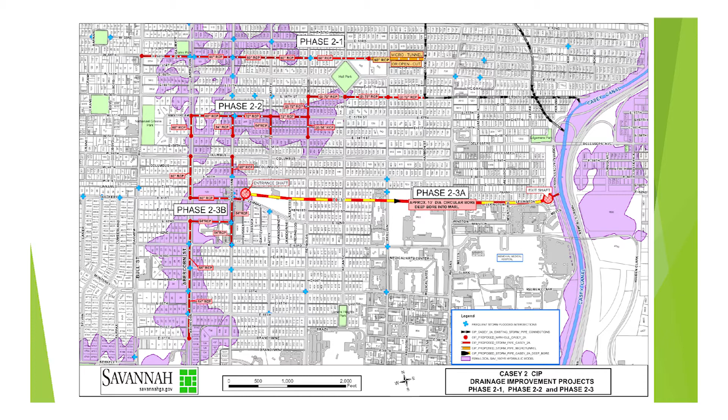And so again, this is not to get rid of any of the conversations for Casey. This is to really take advantage of technology and use it to benefit our citizens, specifically focused on drainage, which we all know is a challenge in a coastal city. And so just as I set the stage, I do want to ask Alderman Palumbo to come up and just kind of open it up and say a few words about this project. He has some knowledge of it. We have had a few conversations about how technology has improved and why it's important for us. Alderman Nick Palumbo.

Give it up for Heath Lloyd. Now I get to get up here and take all the credit and talk about all the great things that these guys are doing, but I really wanted to take a moment to recognize Mr. Heath Lloyd, because what I want you to walk away from this project understanding today is to have the same level of confidence in it that I do, that it's going to get done, be done well, be done efficiently, while minimizing neighborhood disturbance at the same time.

I'd like to really congratulate Mr. Lloyd and his team. He's our assistant city manager, but many people don't know that Heath actually came up through the ranks in our city government. A Clemson graduate and an engineer, came up through water services, and I believe has spent nearly 20 years with us here at Team Savannah. And I want you to know that because that's what gives me confidence in this project and what you're about to see today. So really, Heath, thank you so much. Give it up for Heath.

What you're seeing really is the culmination of about 20 years of engineering effort, collecting funds, and how we're going to improve our neighborhoods together. I see we're joined here by my predecessor, Alderman Julian Miller. Thank you, Julian, for coming on down, and understanding that this is something we must tackle together. It's not pretty and it's not easy. Retrofitting stormwater work can be painstakingly difficult, but it's important and it matters.

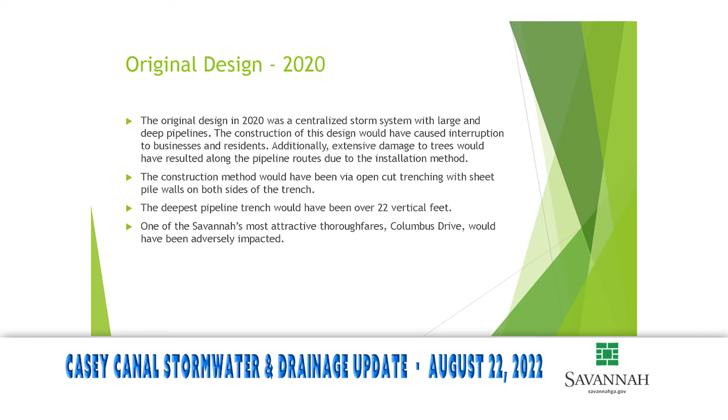And we got a lot of feedback from the public saying, you know, there was a concern that Columbus Drive was the main corridor of this new route, and I think I can go to the next. It's the route here in red, was going to be our first phase, and we're all familiar with Columbus Drive and the beautiful treescape, tree lawn median there. There was a lot of concern: are we going to have to take these trees?

You know, there's a lot of nice live oaks down Columbus Drive, and so we tried to come up with construction methods that would prevent impacts to those trees. There was not a good certainty there. We had concerns. So we decided we had to go back to the drawing board again.

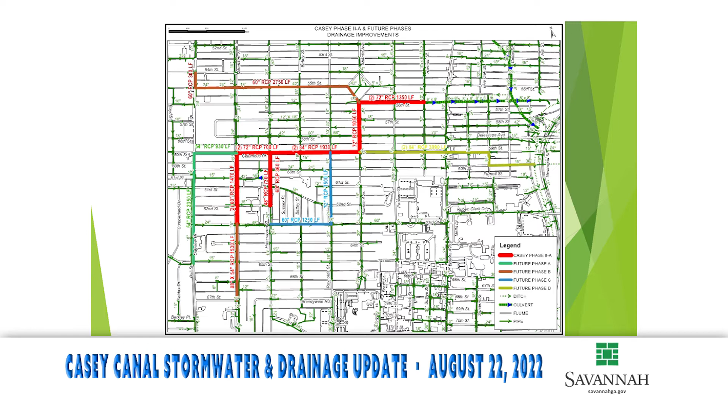And basically what we did was came up with the layout that you now see on these drawings that I'm hoping after this presentation we can break out and do kind of one-on-one and answer questions on a more personal level there. But what we're doing here is actually providing better drainage improvements across a larger area with what we think is a much more cost-effective approach. We're focused on making the improvements where the drainage issues are occurring.

So before, we were running down Columbus Drive trying to get the water basically from Habersham Village to the Casey Canal, Truman Parkway. And the problem with that is there's pretty much a ridge line that runs northeast through this area. And then other than that, everyone's familiar with Bull Street corridor, which rises up significantly from Habersham Village area.

So what you're left with is this bowl here, and the water that sets in this bowl during high rain events can't make its way through the small infrastructure of pipes we have that gets it over here to the Truman Parkway and Casey Canal.

So what we do have to our advantage is the Casey Phase 1 project, which was large box culvert infrastructure that was put down Harmon Street, and then running out 56th Street to the Casey Canal. That made drastic improvements to those areas north, and was built with extra capacity actually on those lines. So what we're able to do here is, again, focus on these areas in purple, which is where our modeled flooding is occurring.

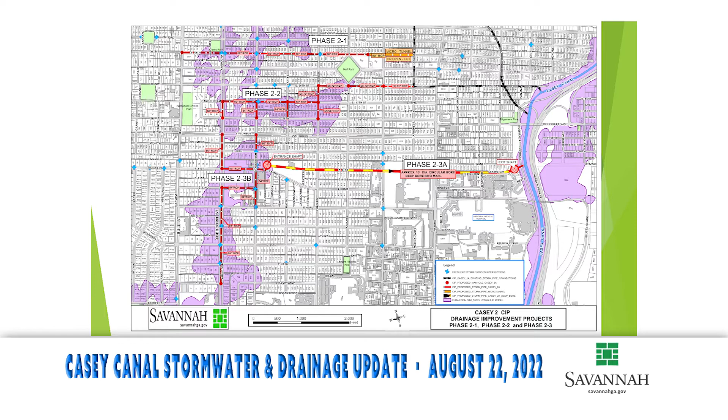After that, our third phase that we've broken this out into now is what really we were originally with the 63rd Street project, and the project that was presented a few years ago was focused on Habersham Village. And I'm sure probably everyone in here is very familiar with driving up and down Abercorn after a big rainfall event and the flooding that occurs, and this modeled shaded purple area here really shows that.

So with this area, the problem is, again, we don't have a conduit to get us from the low point, Habersham Village, to the Casey Canal. So the only way to do that without being very destructive through the neighborhood, to Columbus Drive, the tree lawns, the canopy, we looked at this technique that's being used in Charleston. It's been used in Houston. It's been used around the world. It's a deep tunnel bore.

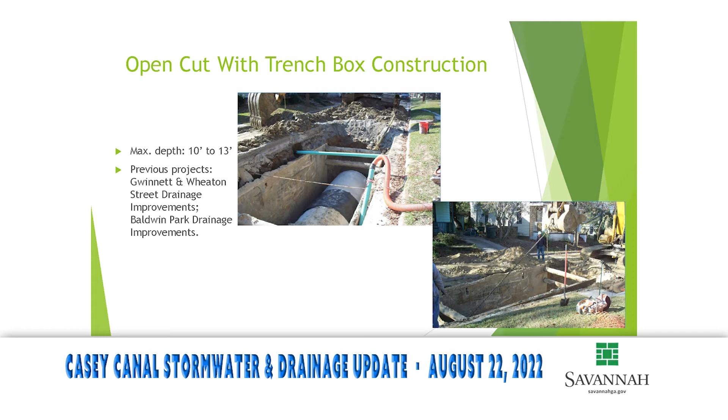And so with this technology, what we've determined is we can take a deep tunnel, go vertically 100 plus feet, get below the marl, which is a geologic strata under us here, turn horizontal and pop back up vertically at the Casey Canal. And basically that entire section of conduit would be at an elevation 130 feet below ground, providing no impacts to the above ground surface residents or commercial facilities.

And I'll go on to the next slide. The guys with Black and Veatch can get into much more detail and nerd out on that than I can, so we'll let them get to that point. But just reiterating what I'm talking about, here's an example of some photos of your open cut, typical conventional construction of storm drainage pipe. Your excavator in the street, narrow streets in this example, working between the curb line, but shallow excavation, 10 foot or less excavation, trench box, you're able to set the pipe in there.

The problem is once you get deeper than about 12 or 14 foot excavation, you're having to put in sheet pile shoring. And that's the problem we run into with what has taken us so long on this project to get to where we are. Because we know what happened in Casey Phase 1. It was a lot of sheet pile, a lot of deep excavation, and there were issues with it. Anyone that was around then probably knows that very well. It was before my time, but I've heard all the stories. So we know that's not acceptable. We know we're getting away from that.

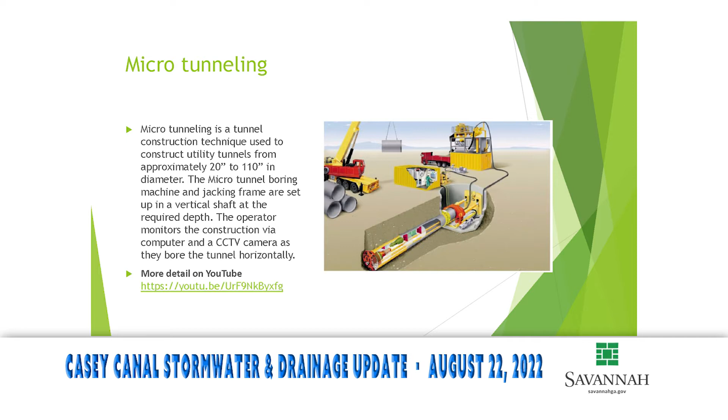Now in areas on this project where we can have essentially 3 pipe diameters of cover above the pipe, so you're getting deeper into the ground under the roadway, we can use a technique referred to as micro tunneling. Typically you need 3 pipe diameters of cover above that operation so that you don't have collapse. That's essentially anywhere from a 20 to 110 inch pipe that is bored and jacked into the ground as the tunnel boring rig proceeds forward. That may be a technique we're still looking at for the far east end of the 54th Street phase, which you can see labeled on these maps.

So the other technique we're talking about is deep tunnel boring. Again, this is something Charleston has used all across the peninsula to move and convey water, storm drainage, as well as sanitary sewer. It's amazing technology, and the surface impacts are not even minimal. There are no surface impacts other than the entry and exit points of the shaft. With that, we can go up to a 10 or 12 foot diameter tunnel.

Oh, he's telling me I got to speak louder. Wow. All right, I apologize, everybody. We're getting a lot of concerns online. They can't hear you. Pull your mic up a little. This mic? There you go. Okay. Sorry, Zach.

I do apologize. All right, I'm about to the end of my portion where I'm going to pass it over to Black and Veatch. Stephen, make sure you're talking real close into the mic. I'm going to pass it to Stephen so that he can go into this in more detail, because to me, what's really important about tonight is understanding this non-conventional technology we're using here, which is the deep tunnel bore. So I want him to take a chance to go into that.

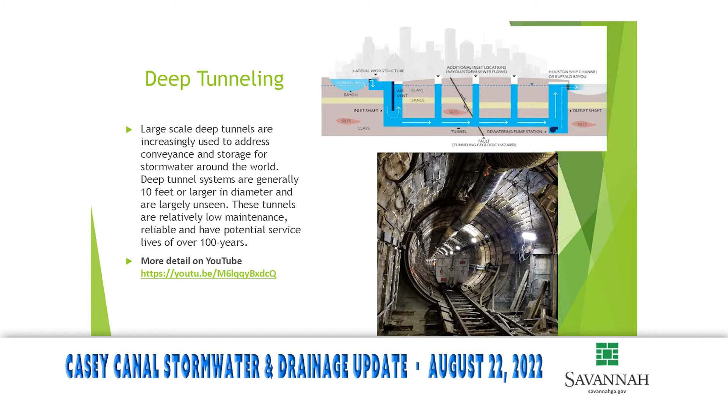What's shown here in orange is not the 100-year, this is more the 10-year event in Charleston, which is amazing to say, but Charleston has less elevation gain than Savannah, which is absolutely incredible because I don't think there's a lot here either. But very similar conditions. You have the river systems that you discharge to here in Charleston versus the canal, but the actual system is very similar.

So what you're seeing here is about a 550-acre area that would be served by this tunnel system. So the rainwater falls, piles up on the roads. It enters this near-surface system. So you still have a near-surface system that connects to the low points in your neighborhoods. Those near-surface systems then hit a drop shaft, drop into the tunnel, and then go horizontal to, in this case, a pump station that pumps it out into the river.

Or in the case of the canal, it's fed by gravity and would come out and discharge right into the canal system. So you have your near-surface collection, into the drop shaft, into the tunnel, and then into an outfall structure into your water body. So this is a typical stormwater system. Here in Charleston, it's only servicing a 10-year storm event, much smaller, but again, you have a lot less elevation change between the center of Charleston and the outfall into the river there.

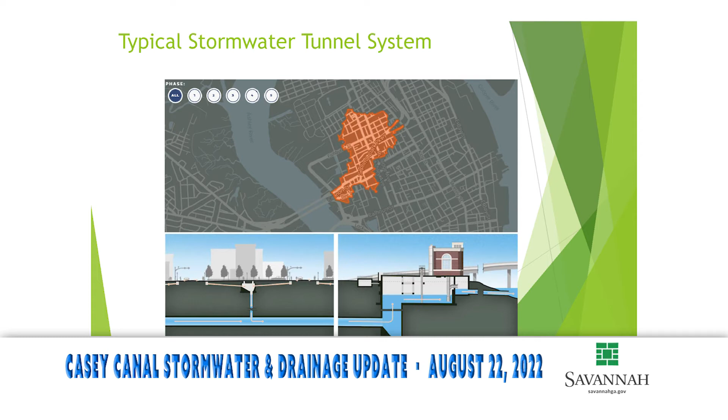But to give you a perspective on how close they can construct to residential structures, commercial structures, schools, this is the baseball field that was left in full operation. They still maintained playing baseball games. We put our fence limits, I think, at about 350 feet. No balls ever came over into the site, so just far enough that no one could hit it there. And then right across the street is a high school, Burke High School in Charleston. So very condensed area, and the site footprint here is about 0.75 acres.

So to just give some perspective, what we look for in an access shaft site is between 0.5 acres and 2 acres. Somewhere in there is kind of the sweet spot for having enough room to put in your tunnel boring machine, store all your materials that would build the tunnel, have enough storage for the contractor to have their tools and equipment, and have a mucking operation.

So just to kind of show you here, these are the trailers, so this is where the contractor and the engineer would sit during construction. Here's kind of storage for the contractor, all their tools and equipment, and then this is the materials. So I mentioned the steel ribs and the wooden lagging. That's what you're seeing here. So it's stored on site as they need it. The crane would pick it up, lower it down in the shaft.

A train then takes it up the tunnel and puts it in place as they're mining and advancing forward. This is the excavated material. So in Charleston, we also have marl, one of the similar type of ground material. We have about 50 feet of what we call surficial soil or overburden, really not great engineering material. And then once you get below that 50 feet, you're in the Cooper marl. It's very similar to what we're seeing here in Savannah. And we actually have some geotechnical investigations ongoing right now to try and characterize the behavior of the ground.

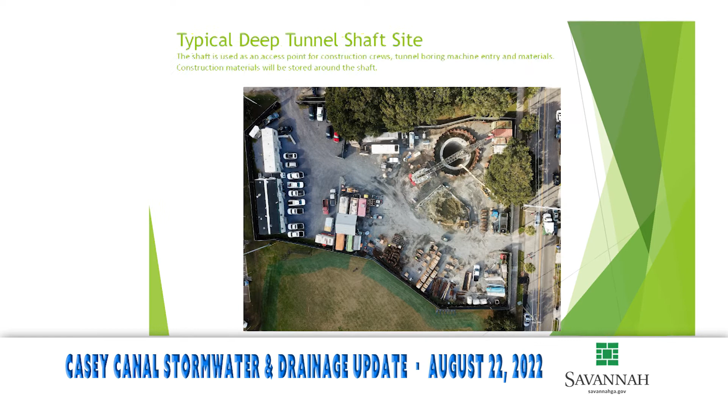So now onto the shafts. So this is looking down. This is a caisson construction for a shaft, and that's what you're seeing here in the upper left. So one of the things that Zach mentioned was on the deep open cut sections, you would have to put sheet piling in. We typically want to avoid sheet piling if we can. We're showing it here. It is a way to construct some shafts, and we've done that before. But where possible, we use the caisson method, which doesn't have vibrations.

So the caisson method, you're constructing concrete at the surface, a ring of concrete, you're digging out the center, and then this caisson's sinking under its own weight. So you keep digging out, it keeps sinking. So what you're seeing always at the surface is like a 20-foot piece of concrete, and that just keeps sinking and you keep building it up. But the benefit there is there's no vibrations, so there's no driving of sheet pilings. So it's less intrusive, less disturbance to the nearby public.

When you're constructing these shafts, we do monitor for vibrations, though. We monitor for site conditions to ensure that it's not causing any damage or any issues, but it's less invasive for sure. Some of the other methods are secant piles or slurry walls. These are typically done when you're dealing with needing to get through soil and into hard rock. We do have hard rock here, but it's not in the zone of where we're going to be. So we're planning on being all in soil, which means we'd probably be focusing on either the caisson method or the sheet piling method.

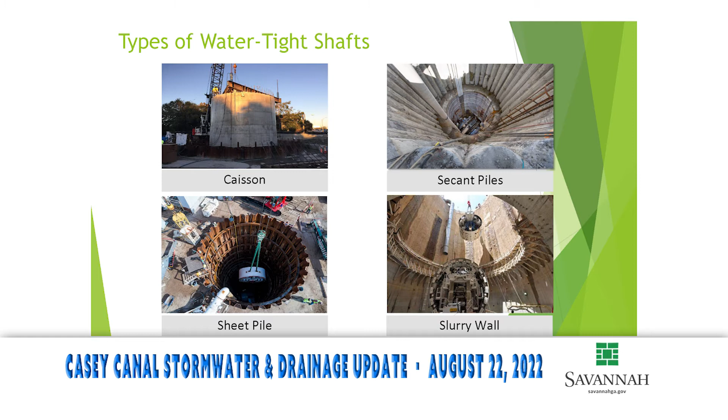So what we envision for both of these is driving them down, socketing them, or getting them to sink into the marl formation, and creating that watertight seal, so you're not having any ground or groundwater flowing into your shaft. So that helps stabilize the ground for a safe excavation. So we went from the overall shaft footprint to how we construct the shaft. Now we picked some specific sites in Charleston that show the construction before and after of a shaft site location for a tunnel system.

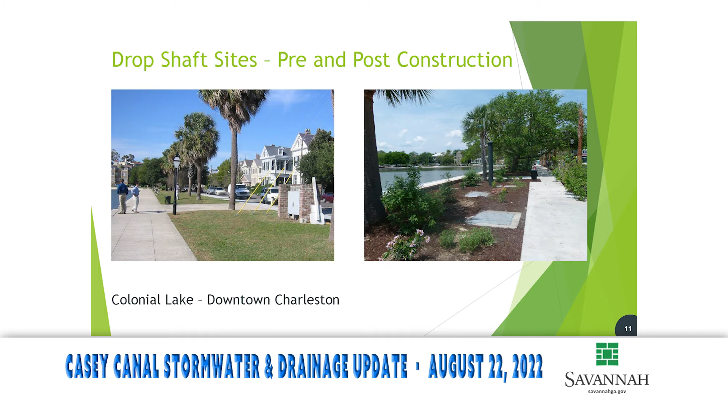And just happy to show that before construction and after construction, the only difference you're seeing is some access hatches in the middle of the street. But overall, no impacts to the residential community. You're not having to rip down trees. I mean, you can see the same trees that were here before are also here afterwards. So trees remain in place, the infrastructure, all the beautiful sidewalk and paving remains in place. So you're very limiting the impacts to the public with these shaft sites.

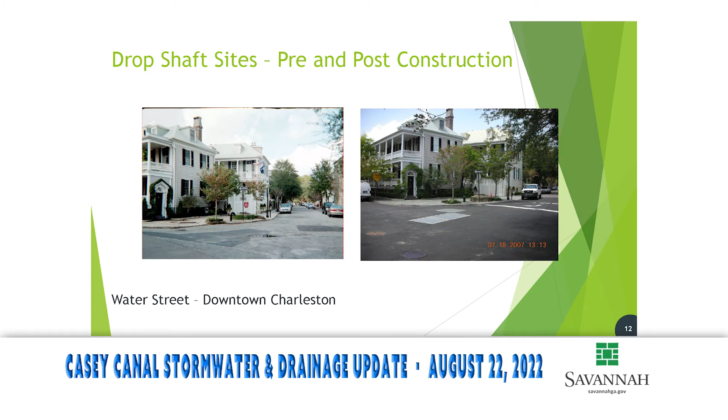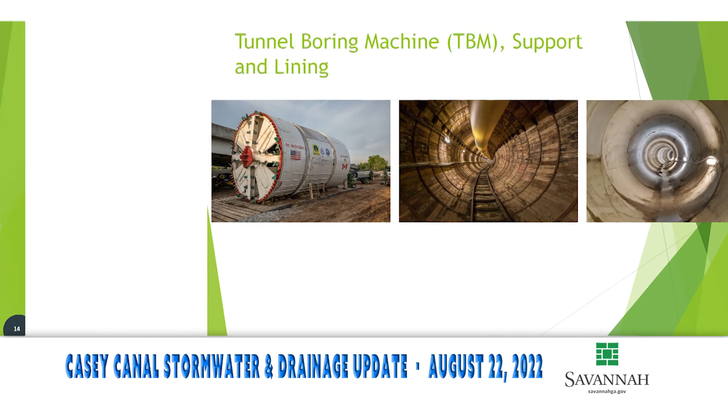One of the kind of benefits of tunneling is we don't typically get to present on it because no one really knows what we're doing. It's kind of sight unseen, so it's kind of nice to talk to people about what actually is going on underground. But this just gives you a good feel for there's no disruption. And typically what we do is we stay in existing rights of way and easements, so we're not crossing under any properties unless absolutely required.

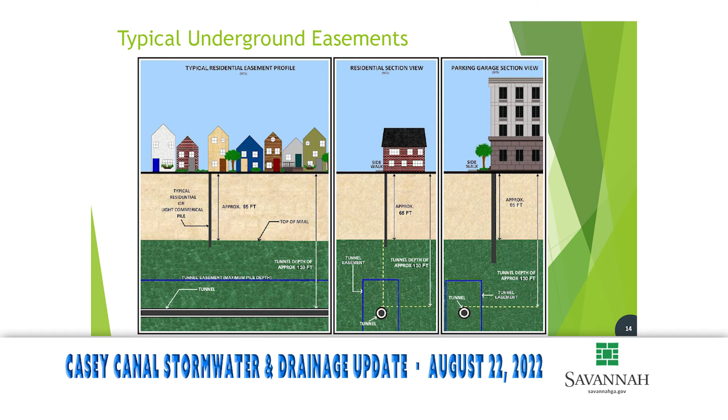And so with that, I was going to hand it back over to Zach, and I'm happy to stick around later and answer any questions. Just happy to be here and talk to you guys about tunneling.

So real quick to kind of wrap up before we can break out and look at the maps one-on-one, I do want to make one other point. So right here, we wanted to show real quick where our entry and exit vertical shafts were being planned to be located. And you can see here in the aerial, that's Jacob G. Smith School, and the spot basically there along Habersham. So we've looked at that location as being a solid potential for this vertical shaft. It's also the low point of this general drainage area. So we would have good positive drainage from any ancillary pipes that would be bringing the drainage to the vertical shaft.

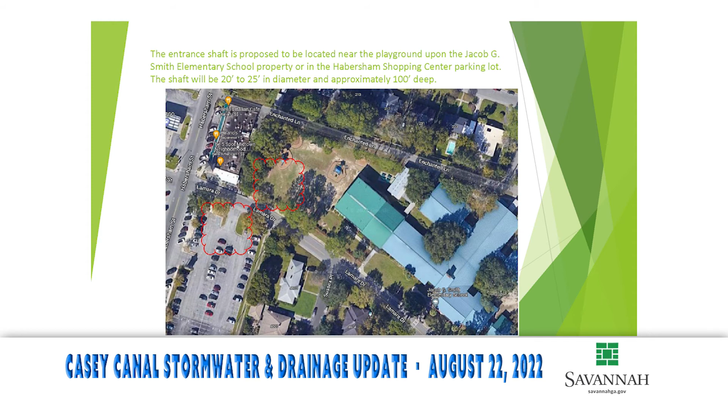That area, as well as the parking lot, of course, there at Habersham Village, which would probably be a bigger impact. Are y'all coordinating that entrance to Jacob Smith with the future improvements that they're gonna have planned for the school? We understand, we have reached out to them. We understand that they are planning those improvements, and we are trying to coordinate that effort. But that's essentially where we're at this time.

We need to coordinate with Memorial Hospital on identifying and establishing that exit shaft. And then you'd essentially have a large box culvert or bridge over the frontage road there before it discharged into the Casey Canal.

Let's see, okay. And so some references there that are going to be provided just for more information on the deep tunnel methods.

But I do want to go back, because there are some case studies we could go through, but going back, I know everybody wants to know schedule, and that's something I didn't really mention before.

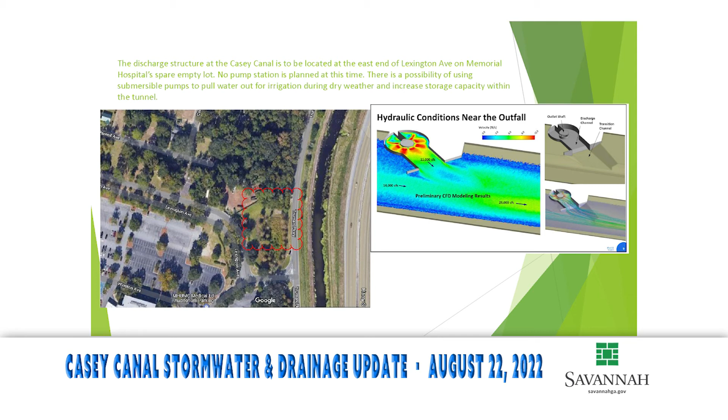So in regards to schedule, right now, on phase 2-1 from Reynolds to Atlantic, there's a section of currently compromised storm drainage pipe we identified recently. Instead of replacing that smaller 18-inch pipe with replacement 18-inch pipe, since we know this project's in the works, we're going to go ahead and do a replacement on that block with 60-inch reinforced concrete pipe, and that should be beginning next October, basically. We should see construction beginning at that block.

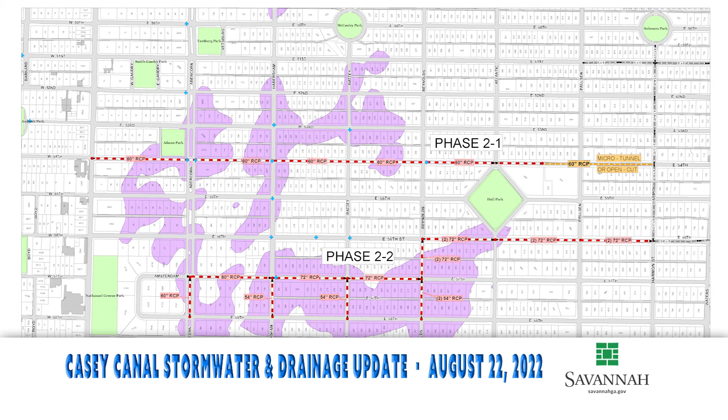And as we wrap up the design on the rest of phase 2-1, we should basically roll right into beginning construction on that entire segment from Bull Street all the way to tying into Harmon. That entire section design will be wrapping up, as well as 56th and 57th. And my goal is that next year, it's hard to say, we have not put this out for bid just yet, but per the construction schedule, we should be completing phase 2-1 into next year.

And then moving straight into phase 2-2. So my goal is in the next 2 years, we would have phase 2-1 and 2-2 well underway in construction, if not getting close to wrapping up. And as Alderman Palumbo mentioned, those are fully funded projects ready to go.

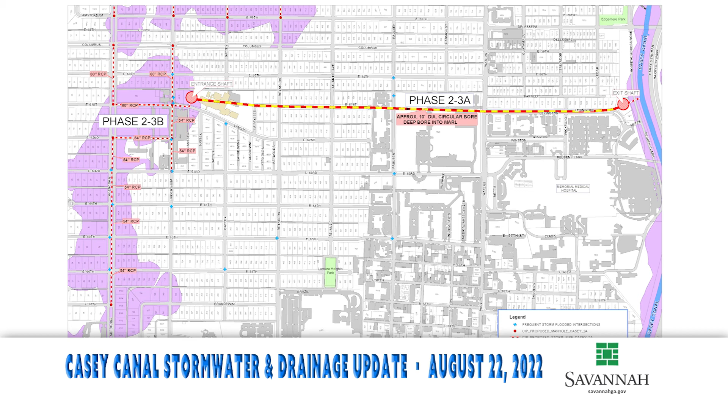As far as phase 2-3, A and B, which includes the deep tunnel bore, we have to get further in design on those. We're well underway, but we are not as far along as we are on phase 2-1 and 2-2. So we want to move forward with them, while we also are trying to generate additional funding that's going to be necessary for the third phase. So I wanted to mention that as far as schedule.

And then for 2-1 and 2-2, is that a traditional open cut, the 10-foot depth I think you mentioned earlier? Yes, sir. Right, so basically you're going to block that section of the street off while you're doing that construction? Correct. It'll be basically a block at a time, but a moving operation where it's being open cut, pipe installed, backfilling, gravel. Likely asphalt won't be put back right away, but it'll be gravel so residents can access their driveways and get to their residence.

Now there will potentially be, as that moving operation's coming through that block, a week possibly where residents may be impacted and can't make it to their driveway. And we understand that, and in the past we've dealt with this on other projects, Baldwin Park, Gwinnett, Wheaton, Culver projects, where we just coordinate and work with those residents to accommodate as best as we can.

But there's no structural impacts you feel from the 10-foot depth? There should be no structural impacts. It's standard construction excavation. Not to say that a machine working doesn't cause a little bit of movement, but this is not driving sheet pile and causing those types of impacts.